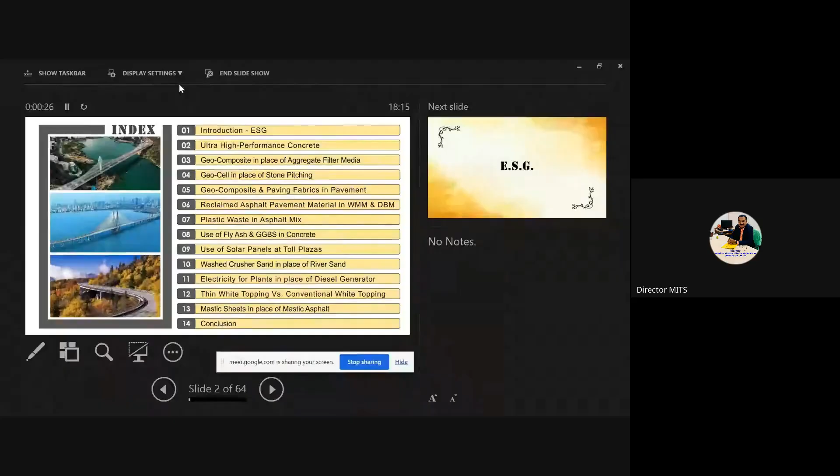I am going to discuss 12 topics, serial number 2 to serial number 13. These are the 12 topics I'm going to cover. I'll try to cover it very quickly, but they're very interesting, not only for civil engineering but for mechanical, electrical, for everyone.

If you see the left-hand side, there are 3 photographs. All those are live photographs of Indian engineering innovations, designs, and construction by Indian engineering companies. The first photograph is in Hyderabad at Durgam Cheruvu, the cable stayed bridge, done by L&T. The second is of Bandra Worli Sea Link in Bombay, very famous, constructed by HCC. The third one was done by KMC in Tripura. So these are all jobs done with this innovative and new generation using sustainable materials, etc.

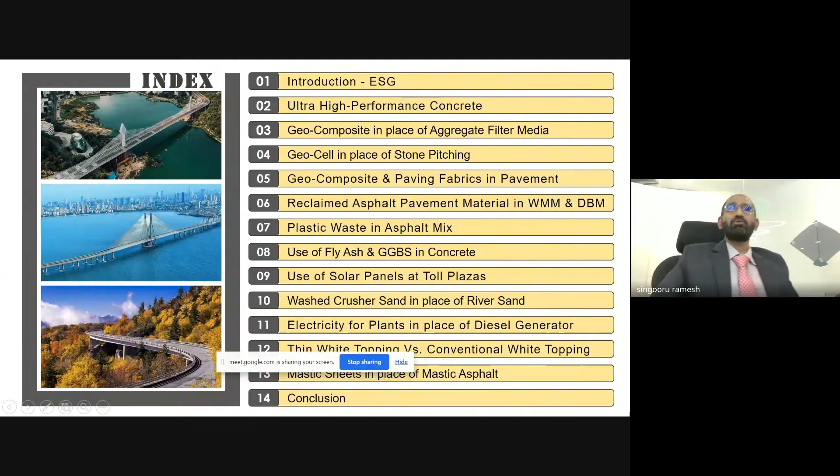So I'll just tell you about ESG. Why am I talking about ESG? ESG means environmental social governance. I want to tell everyone here, ESG is the need of the hour. Every company has to be ESG compliant now. If any bank has to give a loan, or any fund-based lending company wants to give a loan to a construction company, they have to be ESG compliant, only then they give the loan. Even many foreign funds are subject to ESG compliance. So ESG is important, this subject is related to ESG, that's why I'm talking about it.

What is ESG? ESG means environmental social governance. It includes evaluating the company's corporate climate policies, waste reduction, pollution control, toxic waste management, energy use policy, natural resource conservation, animal treatment, and environmental compliance. These factors help you know the company's commitment to environmental well-being. This is a very important aspect, and on this basis only we are going to take our presentation forward.

Then the social impact involves assessing an organization's stakeholder relationships, CSR activities, employee treatment and satisfaction levels, workplace welfare, etc. It shows how committed and responsible the company is towards society. Then governance, associated with elements like honesty, transparency, integrity, leadership, and so many important things. So these three are very essential for ESG compliance.

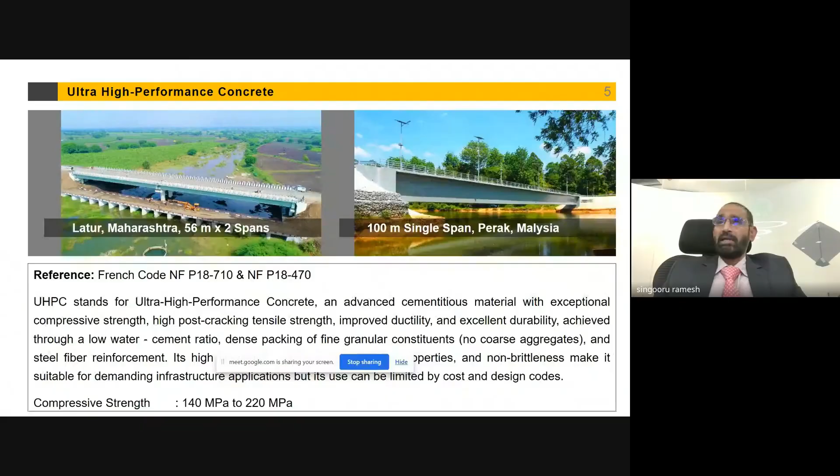Now, if you see the characteristics, as I said, it has high compressive strength and ductility, exhibiting a strain hardening behavior after cracking, meaning it can sustain tensile loads even after it's cracked, unlike brittle conventional concrete. If you see conventional concrete, when it cracks, it will not take the tensile load, but even this cracks, it will still take tensile loads. That is the beauty of this product.

Then durability. Its discontinuous pore structure reduces liquid ingress, leading to enhanced resistance to chloride and a long lifespan. High flowability, the material has

excellent workability and self-compacting properties, eliminating the need for compaction. Yesterday, somebody was asking whether it is self-compacting or not, a question was put. So yes, this has self-compacting properties. Then dense microstructure: it lacks coarse aggregates and uses an optimized proportion of fine granular constituents like Portland cement, silica fume, and fine sand for dense packing. Fiber reinforcement is the main ingredient.

Discontinuous steel fibers are incorporated to improve post-cracking tensile strength and ductility.

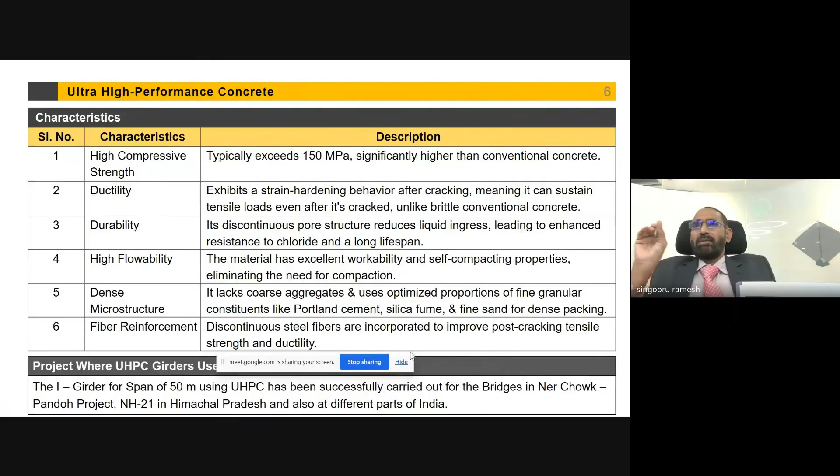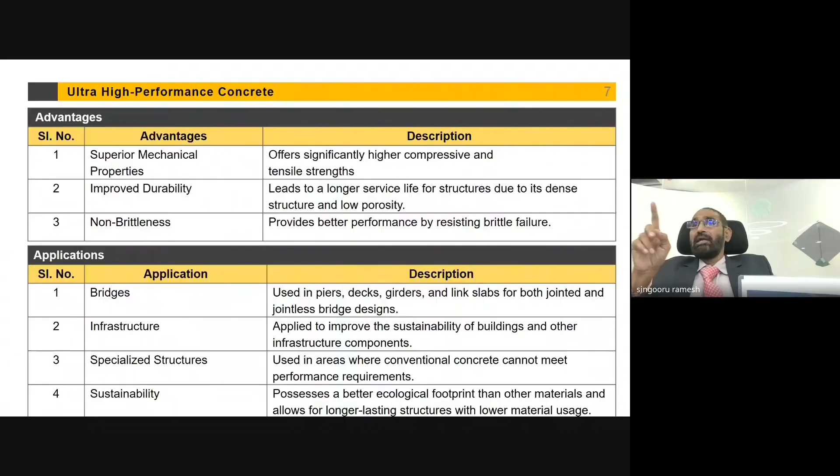I'll show it in the next slide. It has superior mechanical properties, offers significantly higher compression, improved durability, leading to longer service life, and it's non-brittle, providing better performance and resisting brittle failure.

Its applications are in bridges for piers, decks, girders, link slabs, etc. It's used in infrastructure and buildings also. Then specialized structures, where conventional concrete cannot meet performance requirements. Sustainability-wise, it possesses a better ecological footprint than other materials and allows for longer lasting structures with lower material usage.

The advantages are due to reduced section thickness of flange and web, the weight will reduce by almost 50%. That is one big advantage. So the reduced weight per meter helps in designing longer spans, up to 80 meters and 100 meter spans. That is the biggest advantage. If you want to go with normal RCC concrete, you cannot achieve such long spans. That is the advantage of this high UHPC.

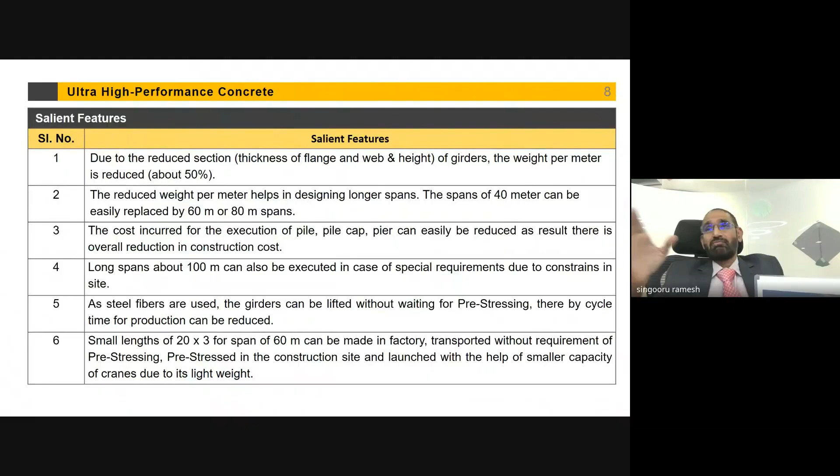And as I said, steel fibers are induced inside. So smaller lengths, like 20 meter by 3 spans, can also be used if we have a transportation issue. We can make it in smaller spans, transport it, and do the post-tensioning at the site location. So that is also one advantage here.

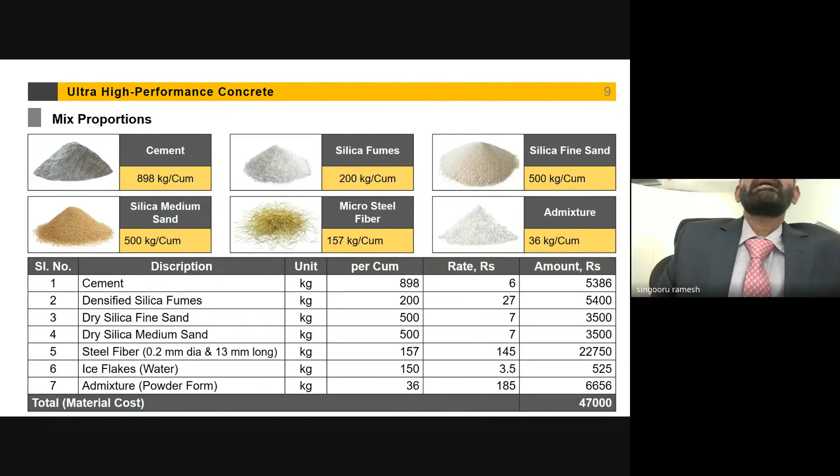You can see the composition: cement 898 kgs, silica fume 200 kgs, silica fine sand 500 kgs, silica medium sand 500 kgs, micro steel 157 kgs - this is what I was talking about - and admixture 36 kgs, which will be in powder form.

If you see, the cost per cubic meter is around 47,000 rupees, whereas the conventional concrete cost will be around 5,000 to 6,000 rupees only. You may ask, when it is so costly, why should we go for this? I think we will leave these questions for answering at a later stage.

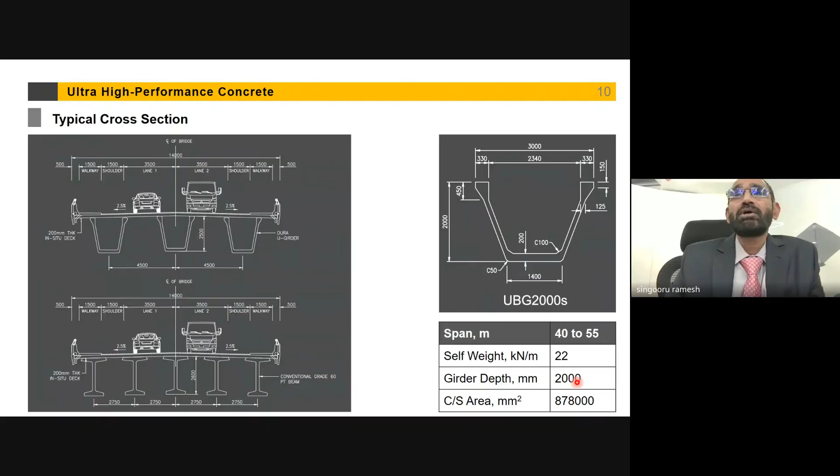So this is the typical cross section. You can see the top cross section. Let me put the pointer. You can see this is the ultra high performance concrete, whereas this is conventional. So this will be the cross section. You can see here the self weight, the girder depth, and the cross section area. All these things will come down.

You can see for different spans also what will be the self weight, the girder depth, and other parameters. That is also mentioned here.

So you can see the typical plan of a ready mix plant for ultra high performance concrete. And if you see the table below, you can see, suppose there is a pile foundation of 1.2 meter diameter.

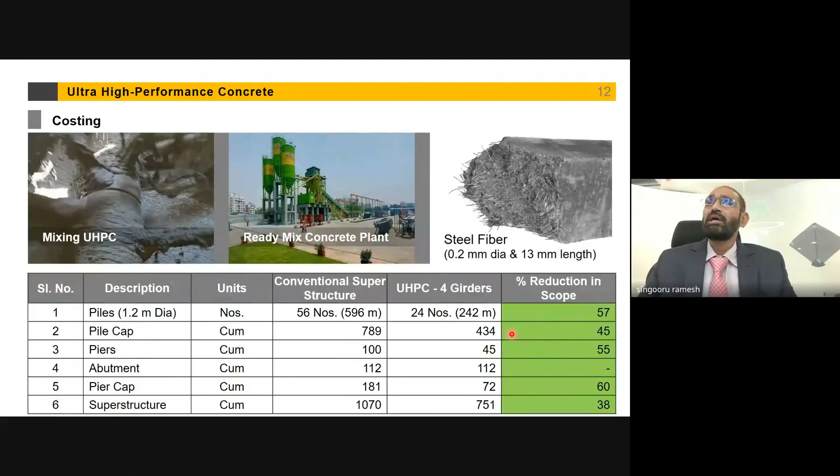In conventional superstructure, if you are using 56 numbers of piles, if you use UHPC girders, you will require only 24 numbers because you are increasing the span. So the reduction in scope is 57 percent. Your pile cap count of 789 numbers can reduce to 434. Piers of 100 can be reduced to 45. Abutment pier caps of 181 can reduce to 72. Superstructure of 1070 cubic meters can come down to 750 cubic meters. So these are the savings.

And you can see these, these are the steel fibers. The dia of the steel fiber will be 0.2 mm and the length will be around 13 mm. They are with copper coating, which is provided for chloride resistance, sulfate resistance, etc., and also for corrosion protection.

See, these are the finished products where they have been launched in different locations. They are being used. You can see here also in Dharampuri, they have done 102 meters.

Why am I talking about these spans? I'll tell you. If you see the obligatory spans constructed in cities, in metro cities and all, there will be obligatory spans. In obligatory spans, a flyover will be there, and in between there will be huge openings where a 4-lane, 6-lane road will be passing, so there will be no obstruction. In such locations where you want obligatory spans, you can use the long spans.

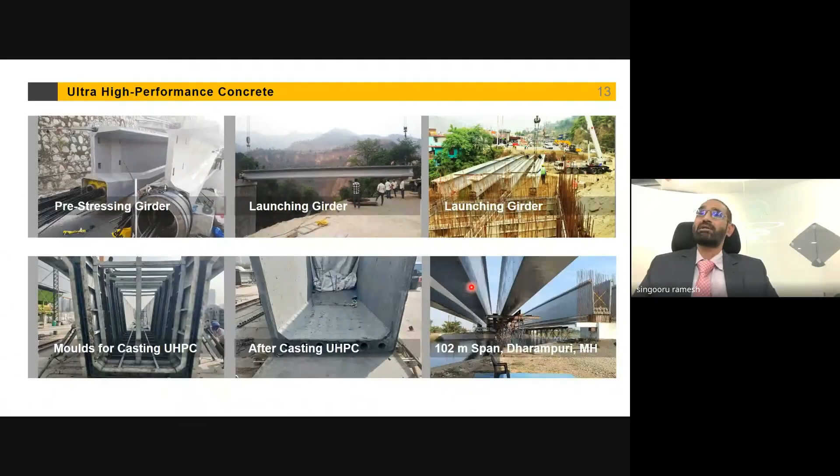This is being largely used by many construction companies, including L&T, Navyuga, HCC, many good companies, Afcons. They are using these kinds of things for different specified applications, some special structures where the span is higher. Even in railway spans, where there is a ROB, you can use this kind of span, because in railway bridges there should be no interruption - there will be no pier or anything in between. So that is about the UHPC.

Now I will come to the next topic, the geocomposite in place of aggregate filter media. Filter media is one important material. It's normally stone aggregate, so again you have to do quarrying, which is again an environmental concern. With geocomposite, that stone quarrying will not be required, so cost will reduce, time will reduce. There are many advantages, and the application is also very simple.

If you see the left hand side picture, this gray color one is the geocomposite. Just fix it there, and you can fill with your soil - there is no more filter media required. At the bottom there will be one perforated drainage pipe, so whenever there is flooding or rain, the water will flow through the permeable soil and enter into that drainage pipe and get drained off.

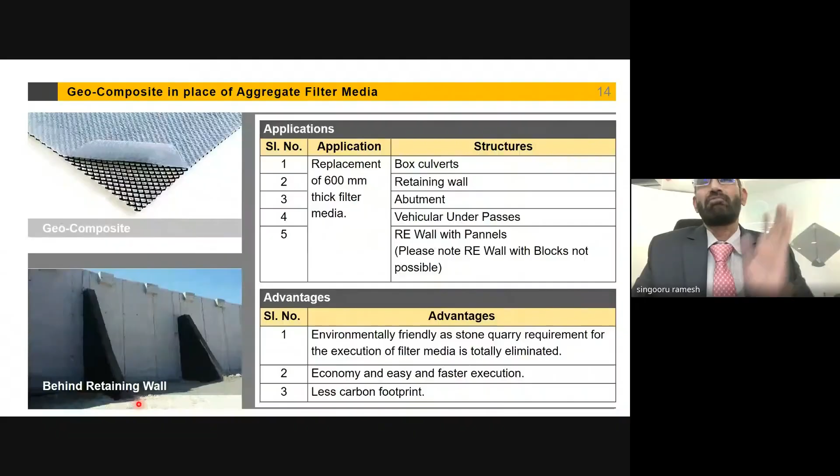So this is an effective solution, and the material here is also HDPE, high density polyethylene - so there is no plastic concern, and you can reduce the quarrying, as I told initially. This is also one of the ESG measures, environmentally friendly, as I mentioned in the first slide. There is a reference code also for this: SP59, and the railway code RDSO IRS 0006.

The combination is geotextile, a permeable fabric like synthetic material typically made from polypropylene or polyester, at top and bottom, and geonet made of high density HDPE or polypropylene at the center.

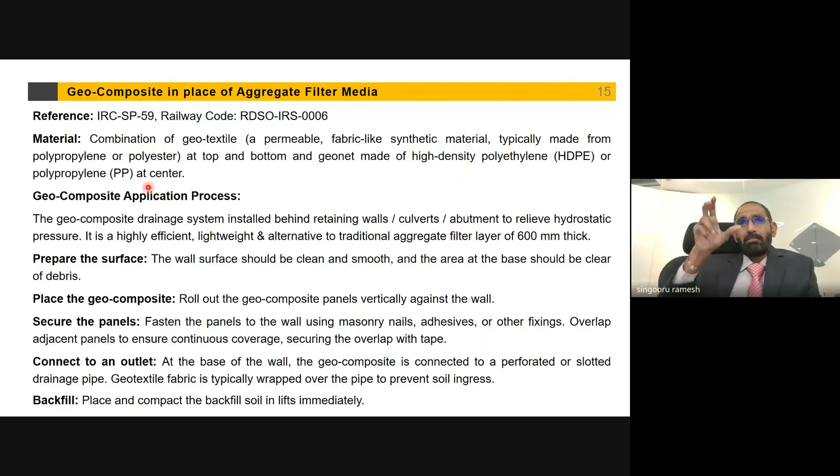For geocomposite application: the geocomposite drainage system is installed behind the wall, at the bottom. You have to prepare the surface, then place the geocomposite, secure the panels - you have to nail them so that it will not slip. Connect it to the outlet, then backfill with the soil. That is the typical application, step by step.

You see the conventional one. This is the filter media, and this is the stone aggregate. So you have to excavate, bring the stone aggregate, and dump it there. That is a cost. All that headache is not there, and it's eco-friendly.

You can see the cost comparison also here. If you go for filter media, suppose for 5,000 square meters, it's costing you 90 lakhs. Here it is saving 75 lakhs. There is a cost saving also.

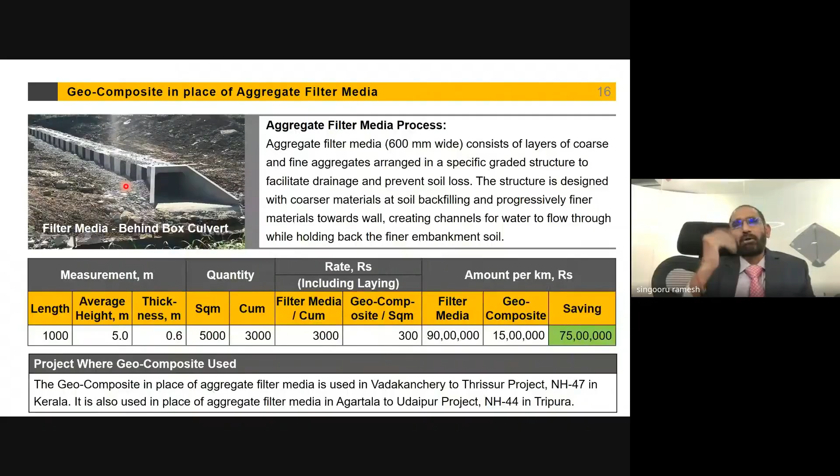In fact, I want to tell you, we used this in the state of Tripura. We had designed this through CRRI, Central Road Research Institute, and we used it for a 48-kilometer stretch in Agartala, from Agartala to Udaipur. Udaipur is a city, a town in Tripura, and Agartala is the capital of Tripura. We used it, and it was very successful. It's performing very nicely.

Now I'll go to the next topic, the geocells. This is also another interesting, innovative, sustainable material. It is used in stabilization of soil to control erosion, to reduce GSB and wet mix when used in pavement, slope protection, retaining walls, and canal lining. So there's no need to execute aggregate filter media. Cost saving, time saving, reduced dependence on stone quarry and crushing — so many benefits are there.

Boulders are not required for slope protection when geocells are used. Stone boulders are also not required. Quarrying can be avoided. It's again environmentally friendly, and it is also relevant to IRC SP59. It's perfectly mentioned in the code.

You can see the typical picture of how geocells are applied. In the olden days, preparation of the slopes was a cumbersome exercise. We had to bring the stones and skilled masons to place it. There was a risk of injuries, so many things. Nothing here — just bring the geocell, lock it at the top and bottom, and do the vegetation.

Site preparation, geotextile placement, geocell placement, anchoring the geocell system, and filling the geocells — it is so simple. After some time, when you choose the infill material like some vegetation, it will become totally green. It will look like a cricket pitch — green and very elegant, very eco-friendly. It will generate a lot of oxygen and reduce carbon.

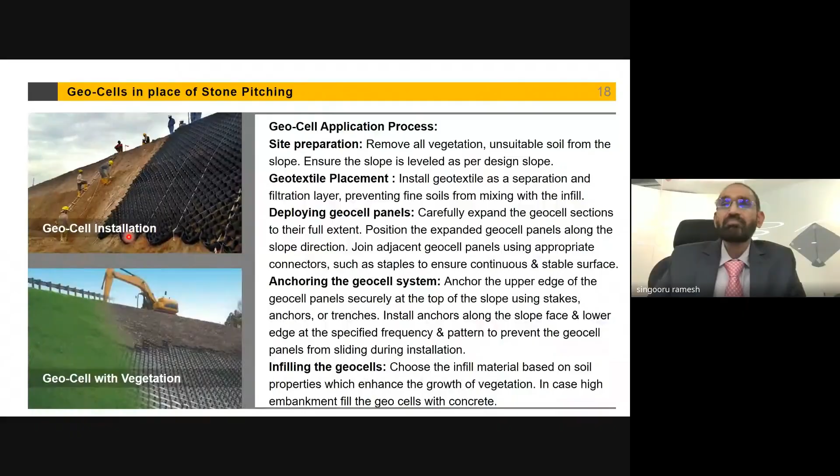And also we used it in Tripura, in Agartala. These are very innovative, very eco-friendly, and easy to fix, with no much labor required, and they are also in line with the codal practices.

Next is geocomposite and fabric. These are the two items — one is geocomposite and one is paving fabric. What is geocomposite and its applications, and what is paving fabric and its applications?

Geocomposite is an engineering material combining geosynthetics, that is geogrids and textiles, to provide multiple functions such as separation between two layers, filtration, drainage, and protection against water intrusion. These materials are used as drainage layers in stabilized soil to prevent water from damaging the road structure and enhance overall performance and longevity.

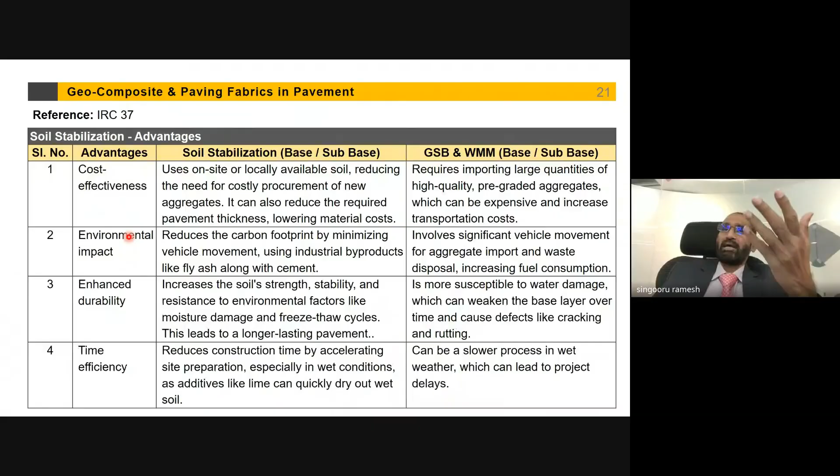Cost effectiveness, soil stabilization using on-site, locally available soil, reducing the need for costly procurement of new aggregates. It can also reduce the required pavement thickness, lowering material cost. GSB requires bringing large quantities, crushing, which is very expensive. Environmental impact, the carbon footprint will be minimized here, whereas otherwise there's lots of waste disposal, fuel consumption, diesel generators working.

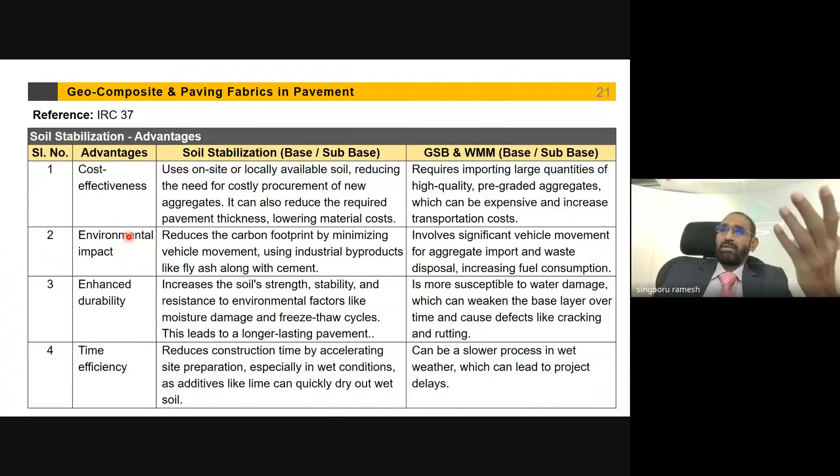Then durability, this is more durable, it increases the soil strength, and it is less susceptible to water damage. And time, as I said earlier, the construction time - suppose you want to do 1 kilometer, if it takes 2-3 days conventionally, this will be over in 2-3 hours. There's a lot of difference, a lot of time saving, apart from cost saving.

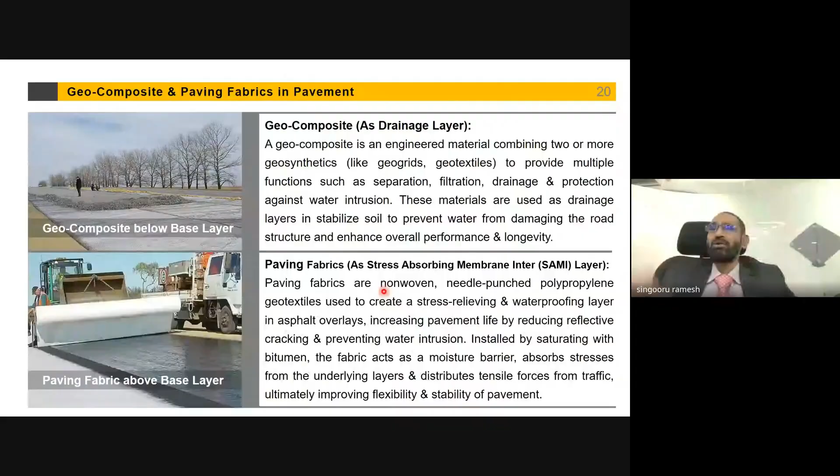Then the paving fabrics. Going back, the second one is the SAMI layer, stress absorbing membrane interlayer. This will normally be below the DBM, that is dense bituminous macadam, and the WMM, wet mix macadam. Between them this SAMI layer comes, and on top of that the DBM layer comes. The idea is to prevent surface cracks from penetrating into the DBM layer, so the bituminous layer and the road will perform well during wear and tear. If these cracks penetrate to the DBM, the road will get damaged.

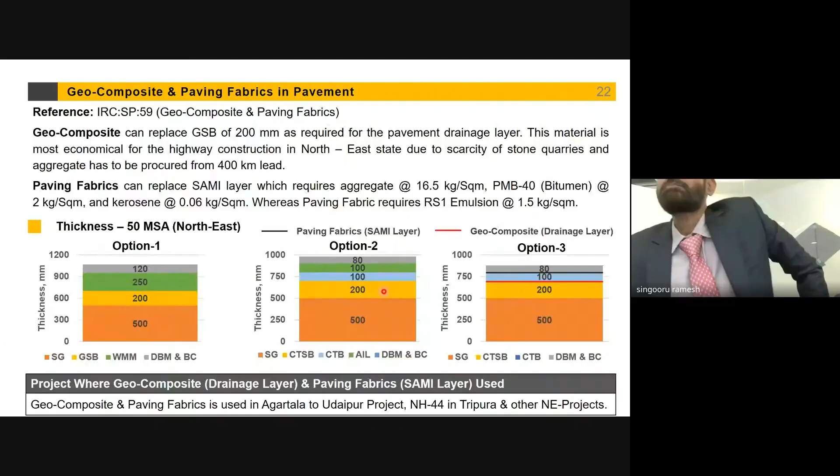The conventional method uses stone aggregates for the SAMI layer, but this paving fabric is an advanced technology. You can see this typical example, mentioned in IRC code SP:59, the geocomposites and paving fabrics. You can see the various options.

For 50 MSA, we have used in the northeast: option 1 is 300 thick, 600 thick, 900; option 2 is 250, 500, 750; option 3 is 250, 500, 750 and 1000, so about 750 only. The thickness has drastically reduced. This we have also used in the state of Tripura. MSA means, as you know, roads are designed for MSA - 50 MSA, 75 MSA, 100 MSA.

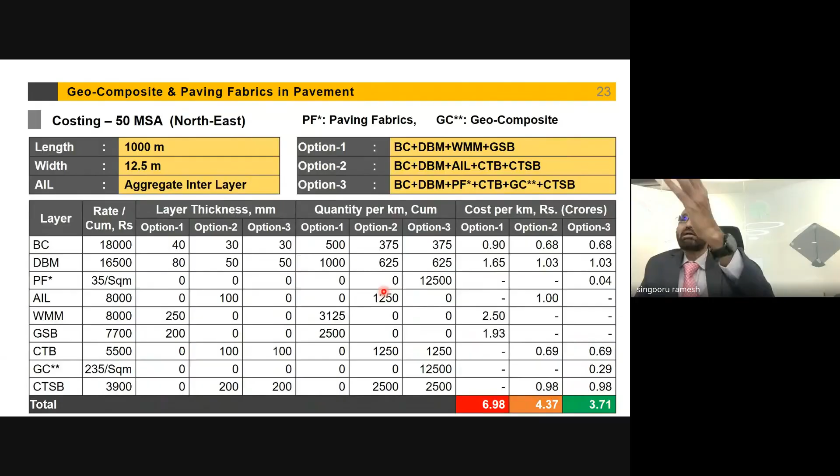I made a small cost comparison for options 1, 2, and 3. In option 1, the cost per kilometer is 6.98 crores, whereas if you go with option 3, using this geocomposite fabric, it comes down to 3.71 crores. Your product is eco-friendly and your cost is also coming down, and at the same time there's a lot of time saving. So a lot of benefits are there in this.

My point is, we have to adopt all this. Already this is widely being used. In fact, I want to proudly say that when I was CEO of my previous company, I took the initiative and did the tests, CBR tests, with my team, and we were successful. We have done this project in the state of Tripura for a 48-kilometer stretch, and believe me, it's almost 10 years old now.

There is no iota of any damage till date, and it's a totally rain-prone zone. Even then, there is no damage. It's performing very well.

So this has been replicated across Northeast, and now it is widely being used in every project, because there's a lot of crisis in the market for stones, since quarrying has been restricted. Quarrying in every state has a lot of restriction because of environmental concerns and local issues. People are objecting to quarrying because there's a lot of noise pollution, a lot of accidents, etc.

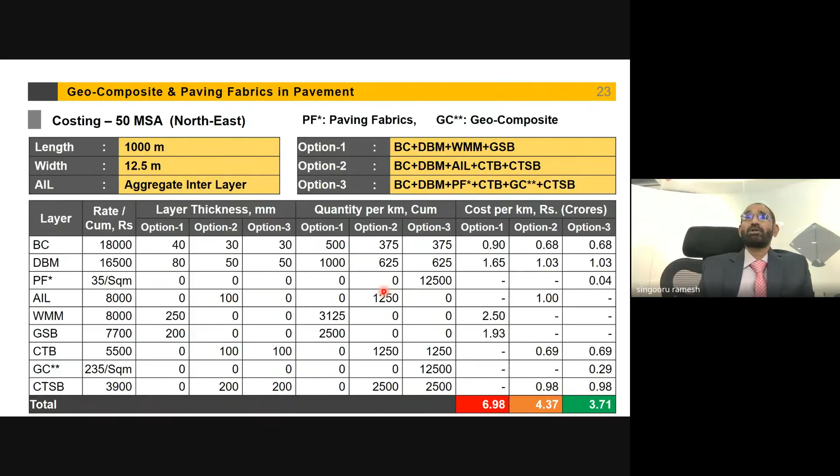They are not permitting it, so stone quarrying has become a highly restricted activity. So these innovative solutions are giving good results as well. It is saving time and cost, and also environmentally friendly.

Next is the RAP, reclaimed asphalt pavement material, in wet mix and the asphalt mixes. This is also as per IRC 120. This is also widely being used and is very important.

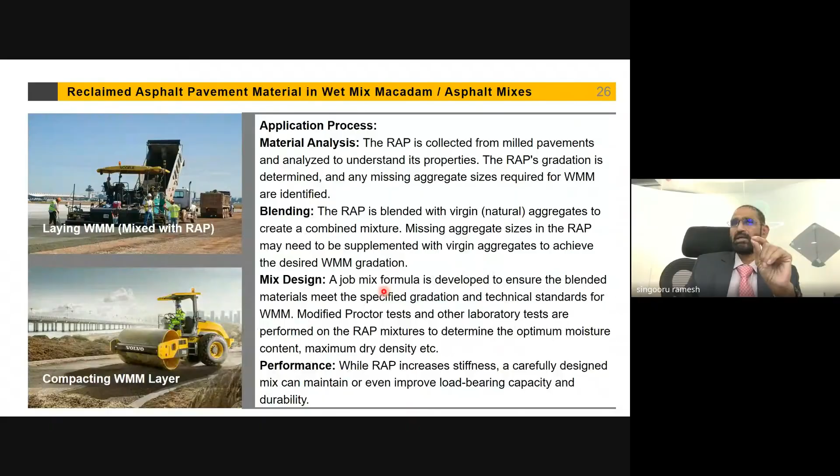Sometimes RAP may be decreased or increased, or bitumen percentage may be decreased or increased, or filler may be increased or decreased, binder may be increased. All these combinations will be worked out. While RAP increases stiffness, a carefully designed mix can maintain or even improve load-bearing capacity and durability.

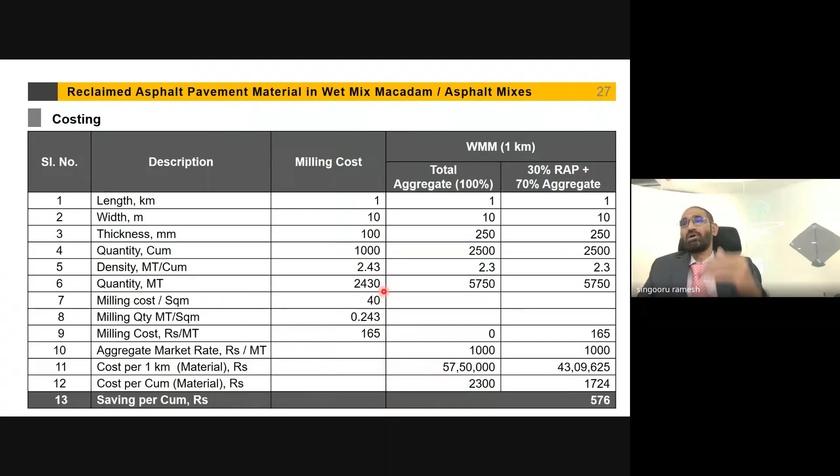So you can see per cubic meter, we just made a simple analysis of how much cost saving is visible. Almost 576 rupees is the cost saving in the entire process, including the milling cost, everything has been calculated. If you go with the conventional process it will be 2,300, whereas it is 1,700.

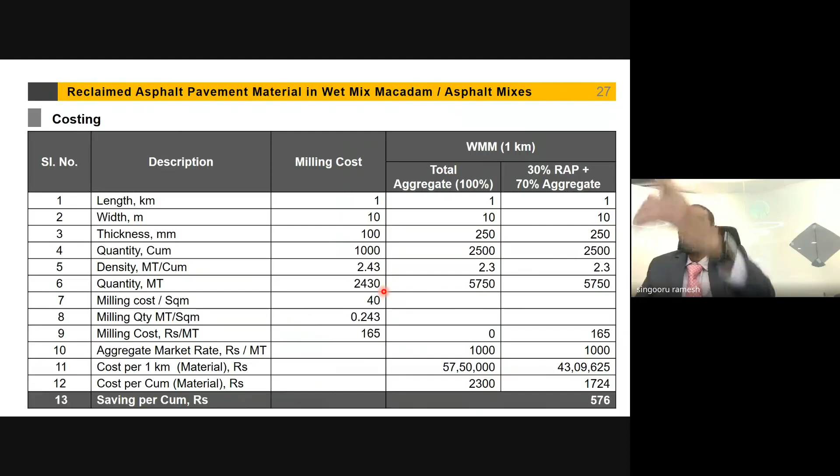These costs depend upon the place. Some places aggregate cost may be more, some places bitumen cost may be more because of transportation. So all that has to be worked out at a particular location. This cost, in some projects, may be 2,300, maybe 2,000, or even 1,800, or even 1,500. It all depends upon the cost of the ingredients, but this particular cost is from a particular project we analyzed. However, you can see the savings.

With appropriate controls, correct proportions of ingredients, and the employment of adequately equipped plants, it is possible to produce an excellent conglomerate which in no way falls short of the mixture obtained using only virgin materials.

Generally, it is recommended to use high RAP percentage in the lower layers of the pavement. While in the surface layers, which are easily ruined, it is preferable to use very low percentages or better to avoid it. The knowledge of the aggregate in the RAP is required to identify the type and quantity of virgin aggregates required to integrate the grading curve. The knowledge of the bitumen content in the RAP, yes, this is very important.

As it is aged, it has a lower penetration than the original virgin bitumen and is also harder because during the mixing phase in the plant and during its life in the road pavement, it is subject to oxidation processes which alter its properties. Hence, when employing RAP, the higher viscosity of the older bitumen might also give a certain resistance to mixing.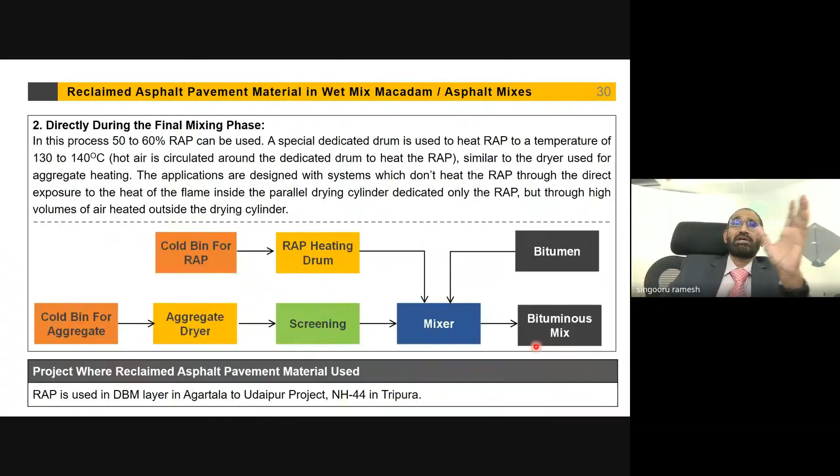used. The temperatures at which they have to be are 130 to 140 degrees centigrade for one, and in case of this one, it will be at 35 to 40. So all these temperatures are also defined.

So again here we have brought the relevant codes, the benefits, technical benefits, and also the time saving elements have been discussed, and the cost.

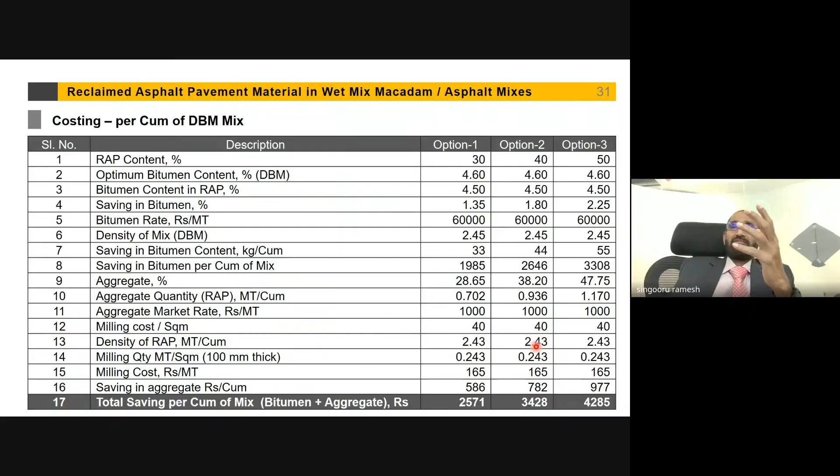If you see here, total savings on bitumen plus aggregate, option 1, 2, 3 - there it is nearly 4,285 rupees saving because your RAP content has increased to 50%. So 4,285 per cubic meter is a big amount.

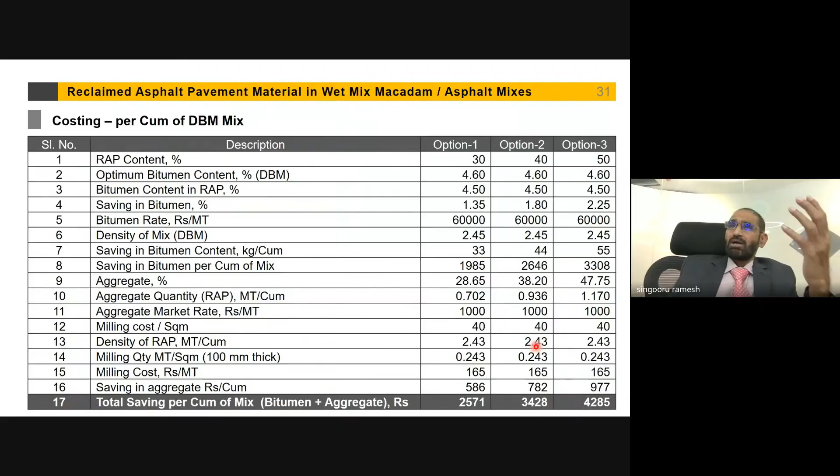So this is a solution for what we call the eco-friendly material - the environmental balancing, the time saving, cost saving, and technically viable. All four parameters are met here.

So this is now coming to plastic wastage. Plastic wastage is a big concern, it's a global concern. Today, if you see everywhere, plastics are very widely used, and they are dumped in different garbages, and the local municipalities are facing a challenge in removing them from the cities, from the communities, etc.

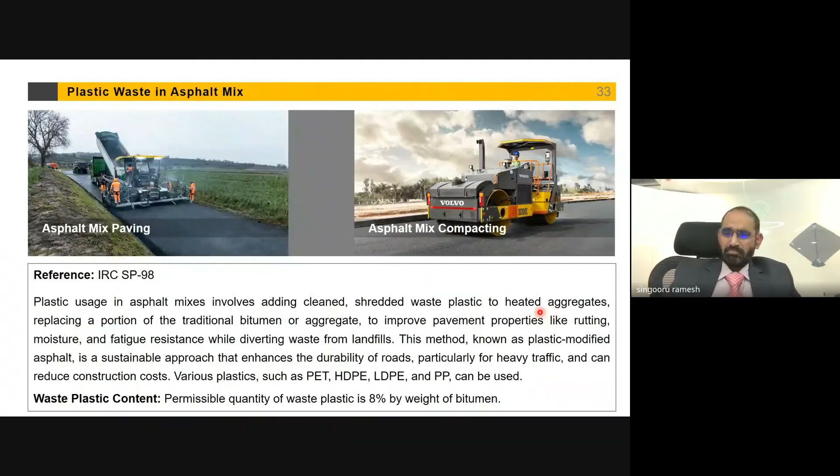So now collecting all this plastic waste and doing some recycling and using it for certain useful applications - it is environmentally friendly, it will reduce pollution, it's also cost effective and time saving. More than time saving, it's cost effective. You see,

one more thing, however, the permissible limit is only 8%. You cannot go 8% beyond the weight of bitumen, not 8% of the total volume of the mix. The limitation is 8% of the weight of the bitumen being used in the mix. That is the limitation.

So waste plastic, low density LDPE is used. LDPE includes carry bags, sacks, milk pouches, bin lining, cosmetic and detergent bottles. HDPE is carry bags, bottle caps, household articles, etc. Polyethylene terephthalate, PET, we call drinking water bottles. Polypropylene - bottle caps, closures, wrappers, biscuit packets, etc.

Microwave trays, polystyrene - yogurt pots, etc., food trays, egg boxes, disposable cups. Polyvinyl chloride - mineral water bottles, credit cards, pipes, gutters, and all these things. For all these, there is a dry process and a wet process.

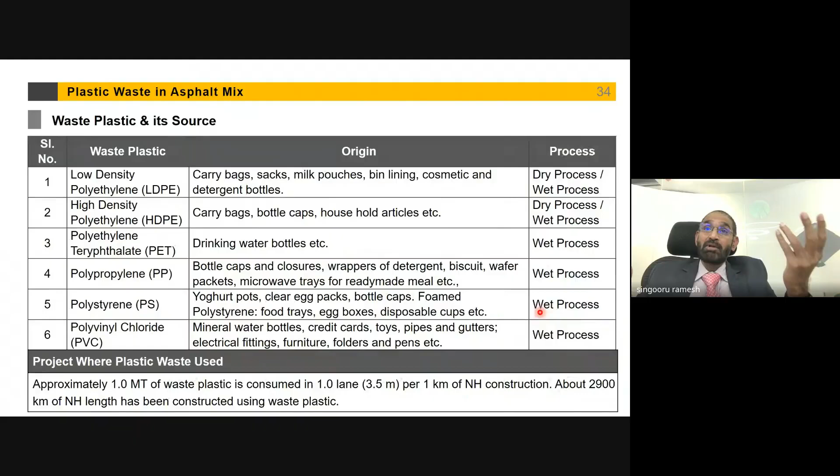Approximately 1 ton of waste plastic is consumed in one lane of 3.5 meters per kilometer of NH construction. About 2,900 kilometers of NH length has already been constructed using waste plastic.

But I'll tell you, I do not know how many of you are aware, there's a huge road network in the country - it is, I think, more than 3 lakh kilometers of network in the country. And we are targeting to enhance it by another 2 lakhs in the coming 5 years. So we have utilized it for only 2,900 kilometers. You can imagine how much plastic waste can be utilized for these purposes, which is eco-friendly and also cost-effective and technically acceptable.

You can see how the blend is there in the pictorial demonstration. The preheated aggregates, then the plastics which are cut into pieces, those two are used in the mix. Then the heated bitumen is mixed in the asphalt mix, and the mixer will mix it. Again, this also will happen as per the mix design.

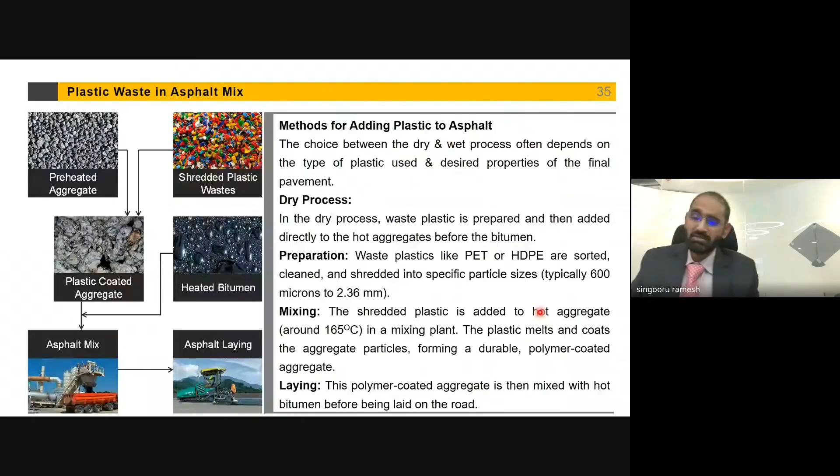So there are two processes here, dry and wet process. This is the dry process. Typically the size of the plastics will be around 600 microns to 2.36 mm, and the temperature at which they are to be heated is 165 degrees. So this is what the ingredients mix looks like.

So wet process advantage is normative guidance and engineering experience, though it is a bit expensive. Drawback is complex production process, specialized mixing and storage facilities. Advantage is high viscosity, drawback is poor storage. Dry process is cheaper but lacks normative guidance, and has a simple production process as advantage. Drawback is performance of mixture, and drawback is poor water stability.

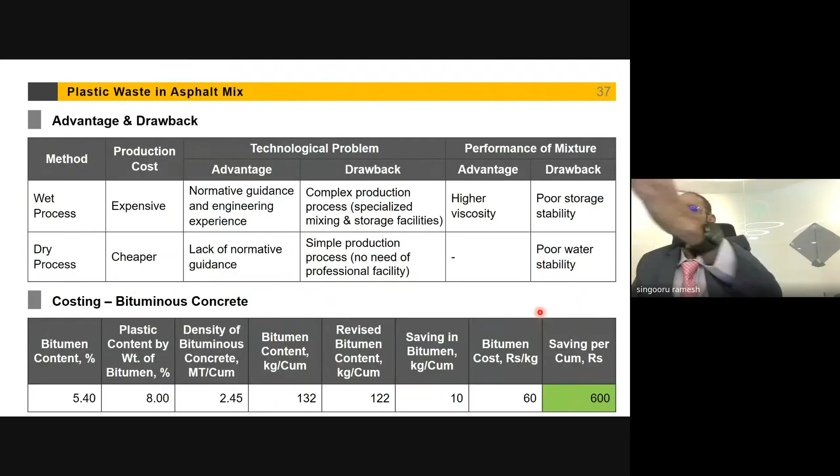If you see in the cost perspective, bitumen percentage is 5.4, and if you use 8%, because 8% is maximum limit, it will come to some 4.9%. That means where you are using 132 kgs, it will become 122, so there is a saving of 10. That is almost, the total overall saving will be 600 rupees per cubic meter by using this plastic. That is the advantage.

If you see, cardiologists are there, orthopedicians are there, then child specialists or pediatricians are there, but there is a general medicine doctor. Now you can call me a general medicine doctor in construction. I am there everywhere. But if you put some design questions, I will have to get into the designs and discuss with the design team and answer. But general questions, yes, I will definitely answer. There's no issue in that. It's just I am telling in a lighter vein.

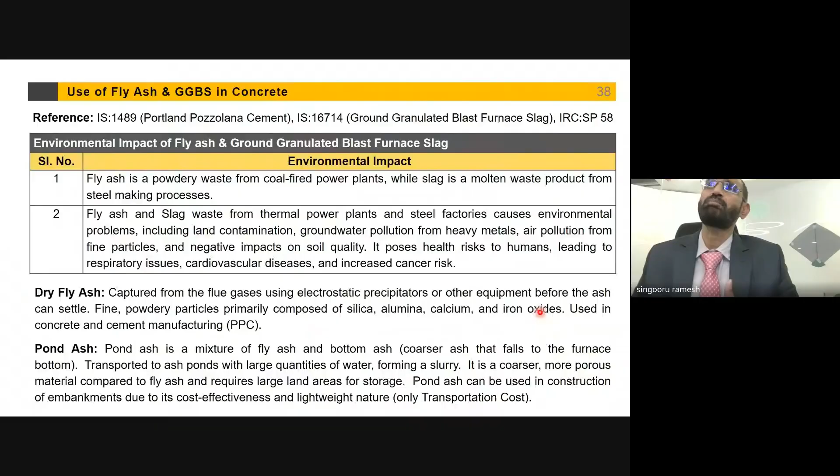Pond ash is a mixture of fly ash and bottom ash, coarser ash that falls to the furnace bottom, transported to ash ponds with large quantities of water, forming a slurry. It is a coarser, more porous material compared to fly ash and requires large storage area. So only transportation cost will be applicable here.

So this is about fly ash. I'll run fast because of time constraint. I'll just go to the key features. We are already using it in our Pune ring road, currently. You can see the various details here.

Then GGBS, that is ground granulated blast furnace slag, is a byproduct of the steel industry. It reduces carbon emissions, improves resistance to chloride ingress and sulfate attacks and thermal cracking. It is used in various infrastructure projects, including bridges, tunnels, foundations, and more sustainable, durable structures.

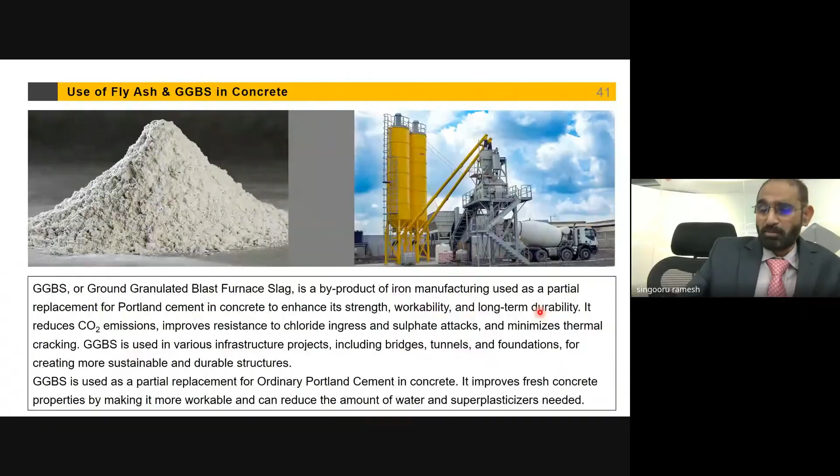Now this is one new important thing. All of you are aware that solar projects are happening, but interestingly, the solar panel concept is growing very fast. I want to tell you, the Cochin airport has installed 50 megawatt of solar panels. You can imagine 50 megawatt in one airport. So it is very, very environmental friendly.

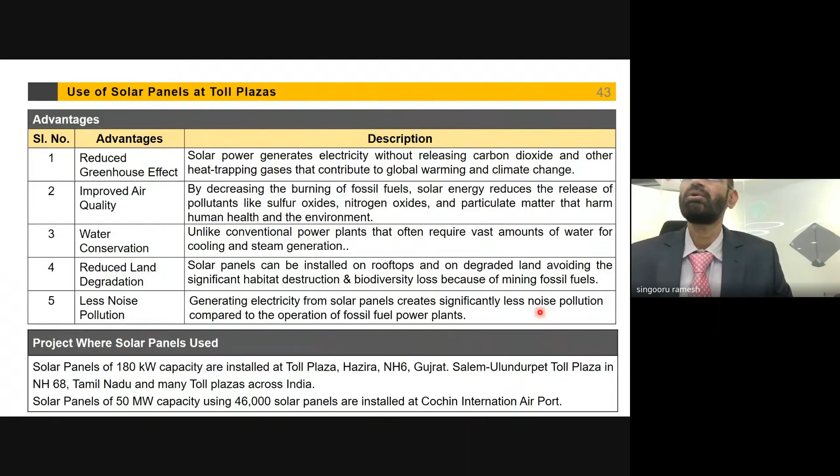There is no pollution at all. So reduced greenhouse effect, improved air quality, water conservation, reduced land degradation, less noise pollution, what not - so many advantages. I don't want to get into the description, I am just telling you the brief advantages.

It has been used in even road projects, in Toll Plaza in Gujarat and Tamil Nadu. Solar power is the energy from the sun that is converted into usable heat or electricity using technologies like photovoltaics and concentrated solar power. Photovoltaic PV cells directly convert sunlight into electricity, while concentrated solar power uses mirrors to focus sunlight to heat a fluid, which then drives turbines to generate electricity. It is a clean, renewable, and abundant energy source with diverse applications, from powering single homes to large energy plants.

As I said earlier, the thermal power plant generates a lot of fly ash and pond ash, but that is being used in cement manufacturing and the road sector. But in solar panels, it's clean energy, green energy. There is no requirement of any such thing - it is directly environmental friendly.

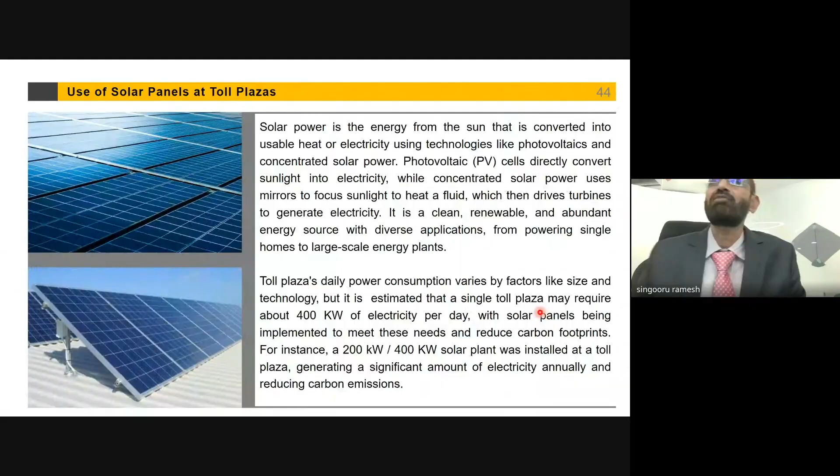In India, installing a rooftop solar system for a commercial or industrial facility like a toll plaza costs around 35,000 to 50,000 per kilowatt. So there are low carbon benefits, low carbon footprint, sustainable infrastructure, and government is also encouraging. Government has been supporting all these new initiatives, and is even funding them - government is giving funds also for all such new initiatives.

Just a typical example - if you see, for 200 kilowatt, suppose cost is 18.74 lakhs, here it's 37.49 lakhs. But look at the carbon dioxide reduction in metric tons per year: in the first case it's 240 metric tons, and in the second case it's 480 metric tons. This is the beauty of this power generation.

I want to tell all the viewers and listeners that, as I said, I have executed thermal power plants, I did solar power plants, I did wind power plants. The potential in this country for power generation - only in solar, in the next 5 years - is 500 gigawatt. That is the potential, and in wind it is 200 gigawatt. In thermal also, I think it's somewhere about 100 or 200 gigawatt. So there's a vast requirement of power, and we have to become more and more green.

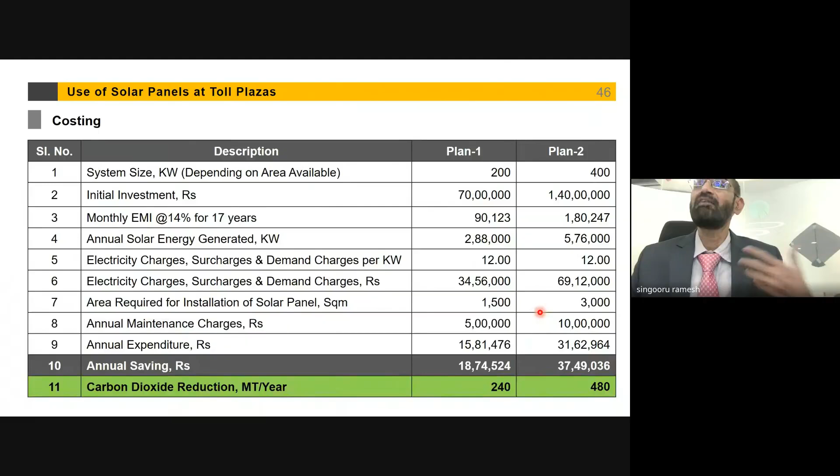So we have to encourage solar power, wind power. In Sydney there is a power plant that uses waves - sea waves are used for generation of power in the city of Sydney, Australia. These innovations are what I was trying to impress upon viewers in my opening address: innovative technologies have to be used, and the mind has to explore new ideas for this type of innovation. This is a benefit to human beings - a benefit to all of us, to our own fellow human beings.

So this is washed crusher sand used in place of river sand. River sand has become a big concern - everywhere there is a big concern about sand quarrying. State governments are imposing a lot of restrictions because of local transportation issues, local pollution issues, local law and order issues, local demands, etc. So the cost of sand is increasing, and construction companies are not able to afford the cost.

So this is simple crushing. Whenever we use a stone crusher, there will be powder, the stone dust which comes out, that will be used in place of sand. That falls under zone 2 - like zone 2 sand is here, also zone 2 will come. There will be a lot of silt in that, so washing will be done. This is also as per IS 383, so washing is done in this process.

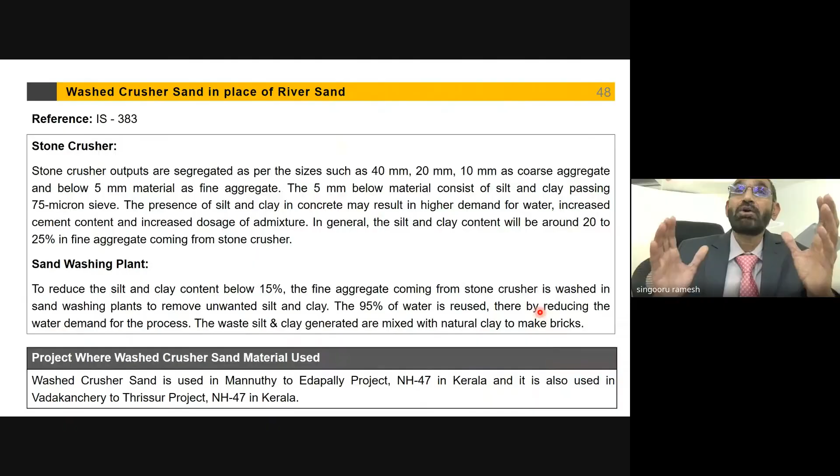There will be a reduction of almost 20 to 25% of this - the silt will be eliminated. So you will get good zone sand from that, after the washing.

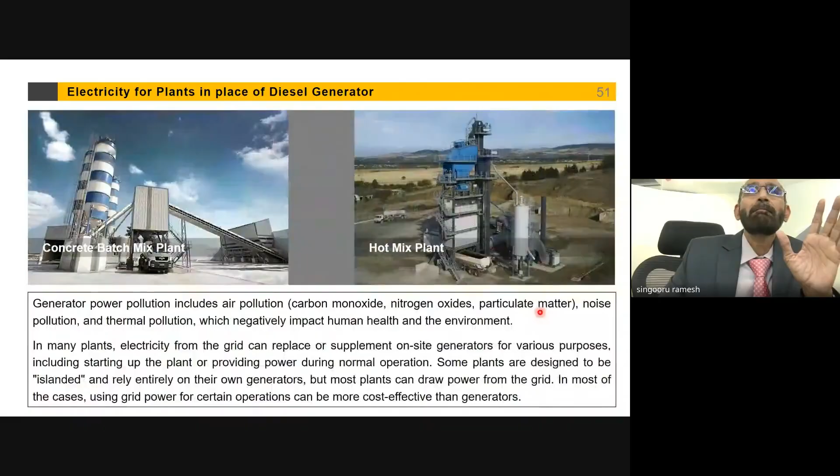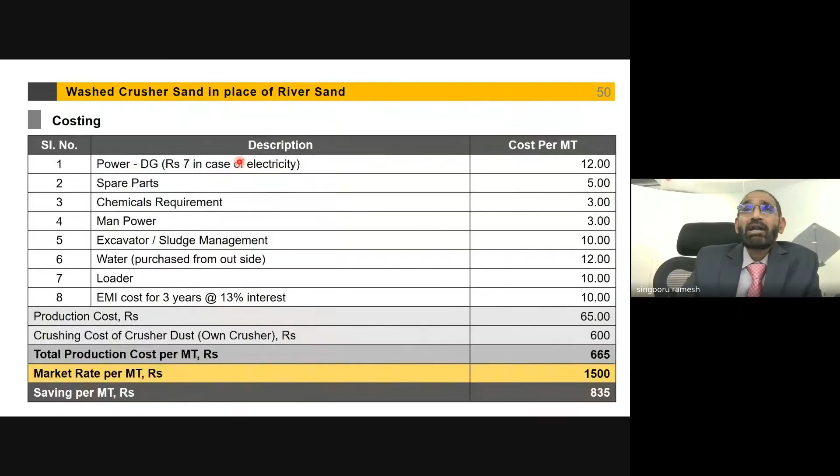It will go to the brick industry, and all the water, after the filtration process is over, goes for recycling. It will again be used, and the finished product will be used for concrete purposes. So there is a saving - as I said, there is cost saving, and also you are not depending upon river sand. That is the biggest advantage here.

People think that initially investing in the plant may cost some 3 or 3.5 crores, but that plant can be used for 3-4 projects. So the money you're saving is much more than the cost of the plant. People should not think about the initial capex - capital expenditure. That will be only an initial investment; it's not going to harm your budget, but in the long run it will give you a lot of benefit, and your dependency on local sand will come down drastically.

See, electricity - you can replace your generators. As I said, I already spoke about this. Now I'm coming to the concrete.

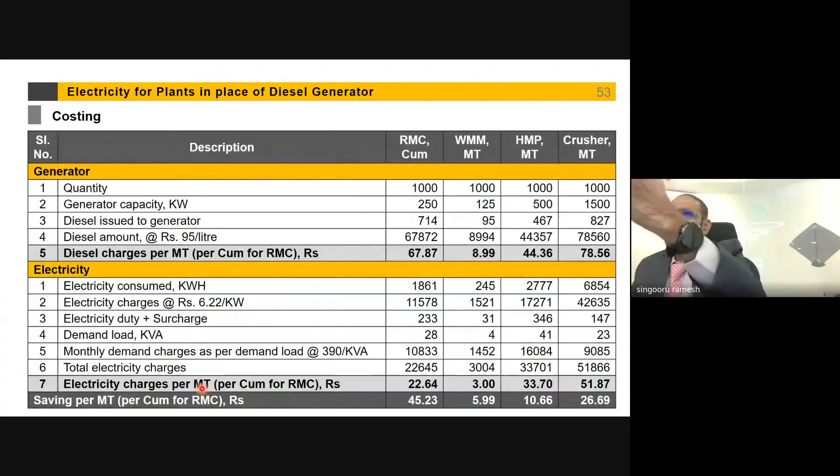If you use electricity produced directly from plants, from electrical sources, from generation, you see the cost - versus diesel generators which cause a lot of pollution. Per cubic meter, if it costs 67 rupees per unit with diesel, here it comes to 45 rupees. In wet mix, it's 8 rupees 99, a 6 rupee saving. In hot mix plant, it's 10 rupees saving. In crusher, it's 26 rupees saving - a huge saving when using HT from the substation. So you have to apply and pay per unit, but there's a lot of saving, and there's no pollution.

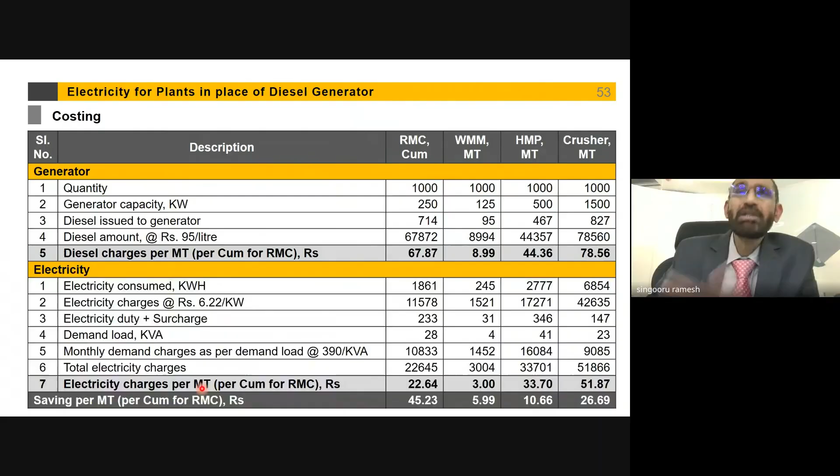There's thin white topping, and nowadays you are seeing white topping and thin white topping in cities. This is a growing demand. I am not going into too much detail because of time constraints. This white topping is widely practiced in cities to keep the road pothole free, and also to maintain uniform riding quality, giving a good finish. It can be done overnight without affecting traffic—one lane can be closed during night for the topping, and next day traffic can move. It is also eco-friendly.

This thin white topping is always done in small panels. In PQC, where we do large rigid pavements for heavy roads and expressways, the thickness is very high, 350 to 400 mm. But here it is only 100 to 150, maximum 200 thickness. The panels are also small, 1 meter by 1 meter or 1.25 meters. So there are no longitudinal bars, no transverse bars, no dowel bars.

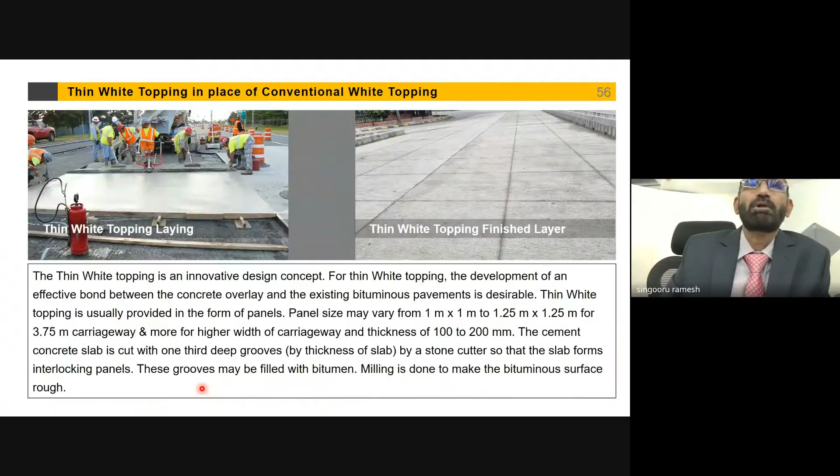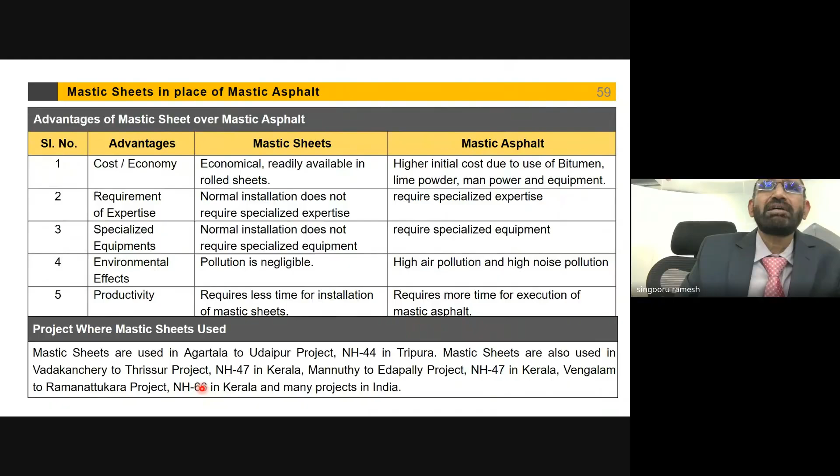Then mastic sheets. Mastic sheets are used in the construction of highways, bridges, and so on, widely used in every project in the country. Earlier we used to use what is called mastic asphalt—you had to do a hot mix, mix the sand, heat the bitumen, mix it, causing a lot of pollution, a lot of labor, a lot of injuries, eye contact issues, so many problems. Now, nothing—just lay this membrane, lay it and fix it. Very simple solution.

This is also very cost effective. For 1 kilometer, with mastic sheets there's a huge saving, 68 lakhs. If you go with the conventional method, it's time taking, labor oriented, with pollution and injuries—so many negativities—but here everything is positive.

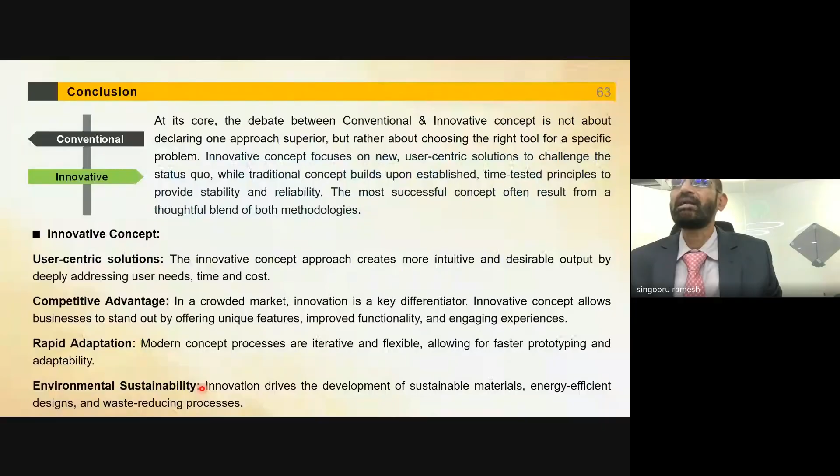So I had to conclude it quickly. I wanted to go into much more detail. Let me read out the conclusion: at its core, the debate between conventional and innovative concepts is not about declaring one approach superior, but about choosing the right tool for a specific problem. Innovative concepts focus on new user-centric solutions to challenge the status quo, while traditional concepts build upon established, time-tested principles to provide stability and reliability. The most successful concepts often result from a thoughtful blend of both methodologies. That's what I was telling the young generation, the faculty, the learned professors, and the intellectuals present here.

Then, innovative user-centric solutions bring competitive advantage, rapid adaptation, and environmental sustainability. So thank you all, I hope I have not bored you. I am open for questions, and I would request you all to put some questions so it will be easy for me to go.

So this is an entirely different topic. We had earlier discussed the sustainable new generation materials. Now this is also related to ESG, and it is for the airports. Let me start with my slides. Are you getting the full screen now? Yes sir. See, we had to spend considerable time in the first session, the second session will be a little shorter. I want to make it more concise to the subject. This subject has been prepared by me in very short notice, however I'm confident I will make the presentation in a convincing manner and attend to the questions as well. Thank you, let me start.

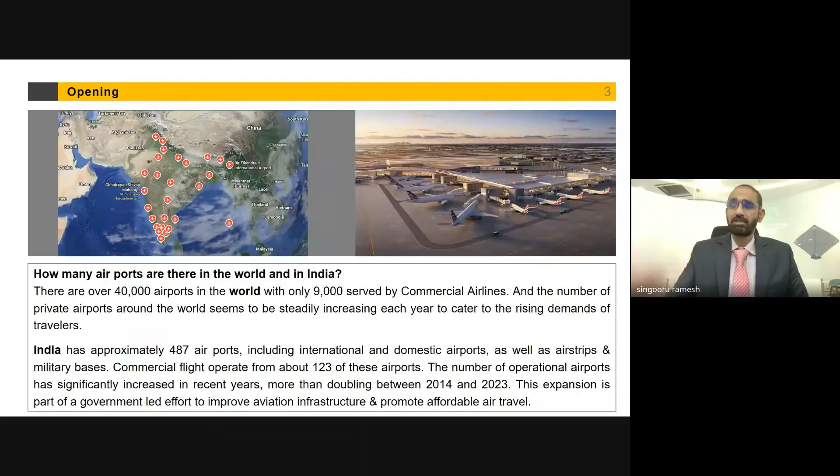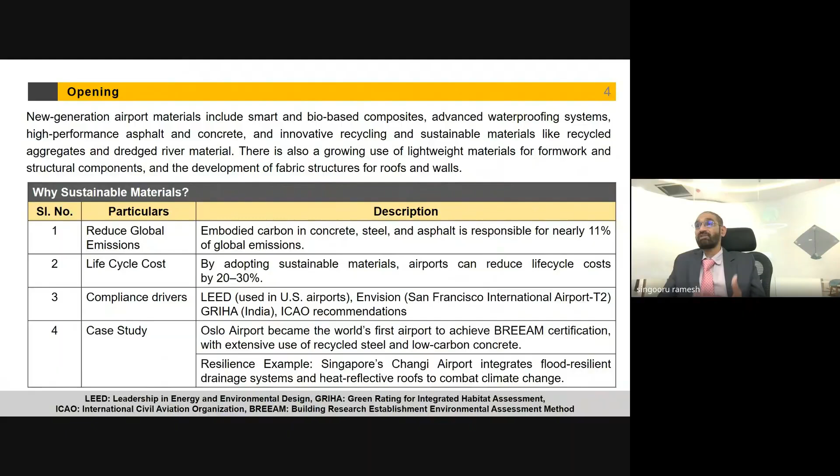Case study: Oslo Airport became the world's first airport to achieve BREEAM certification with extensive use of recycled steel and low carbon concrete. BREEAM is Building Research Establishment Environmental Assessment Method, so that is the first airport in the world. The resilience example is Singapore's Changi Airport, which integrates flood resilient drainage systems and heat reflective roofs to combat climate change. So these are the innovative methods being used in various airports.

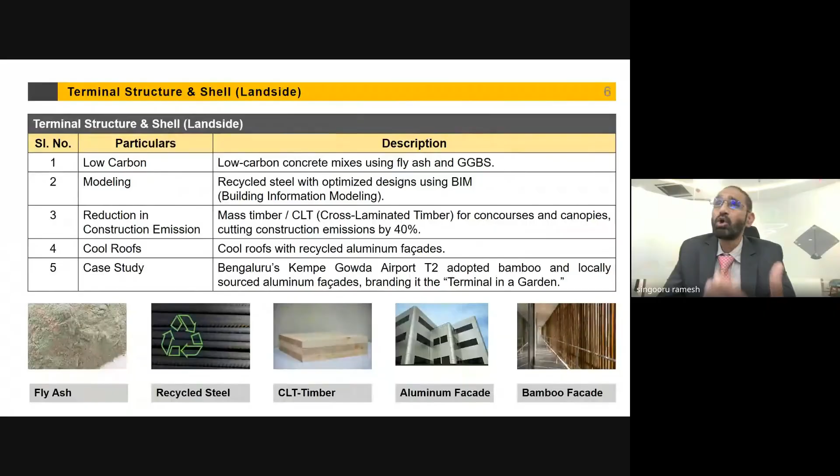I do not know how many of you have traveled to Terminal 2 in Bangalore. I'm sure many of you have. It's very, very elegant, and you can see all this innovative, low carbon sustainable materials have been used over there.

So again, coming to low carbon concrete, it utilizes supplementary cementitious materials, SCMs, like fly ash, slag, silica fume, to replace a significant portion of traditional Portland cement, thereby reducing carbon footprint. SCMs lower the amount of energy-intensive clinker required, which is the primary source of CO2 emissions in concrete. This not only decreases environmental impact but also enhances concrete durability.

It reduces CO2 emissions and also enhances concrete durability; that is the beauty here. Then rice husk ash, RHA, is another SCM that can be used. RHA is a byproduct of rice production that adds cementitious compounds to the mix. Then recycled aggregates: incorporating recycled aggregate materials from construction and demolition waste into the aggregate component of the concrete mix reduces the need for virgin materials.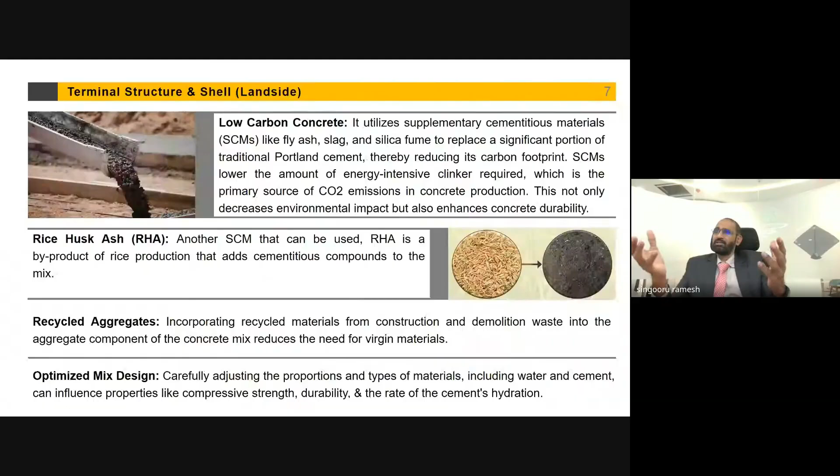For example, if you are demolishing a big concrete structure, you can extract all the waste steel and remove all the set concrete; all those things can be separated. You can take out and make recycled aggregates from that, and use it again for a new mix design, carefully adjusting the mix proportions including water cement ratio. This will influence the compressive strength, durability, and the rate of cement hydration. So all these factors will get impacted.

Then we discussed cross-laminated timber. It is an engineered wood product. Wood is totally a green product, made by gluing multiple layers of solid sawn lumber at a 90-degree angle to create large, high-strength structural panels used for walls, floors, and roofs in buildings.

You can see the benefits here. It's totally a green product. What is timber? Timber is directly from the tree, and the tree is what is a green product.

Bamboo facades: bamboo is durable, fire resistant, and has a natural look. It is stable and available as boards or beams and easy to maintain. It has been used in Kempegowda International Airport Terminal Building 2 in Bangalore.

Then recycled aluminum: recycled aluminum is aluminum that has been processed from scrap and end-of-life products to create new aluminum products, using significantly less energy than virgin aluminum production.

Then terminal interiors and fit out. In terminal interiors and fit out, also recycled material like tiles, terrazzo, and modular flooring systems are used.

Indoor pollution, low VOC. Low VOC means whatever paints we use in our houses and buildings contain volatile organic compounds. If you see when there's new painting, there's a lot of smell, sneezing, and eye burns. So you can use low VOC paints.

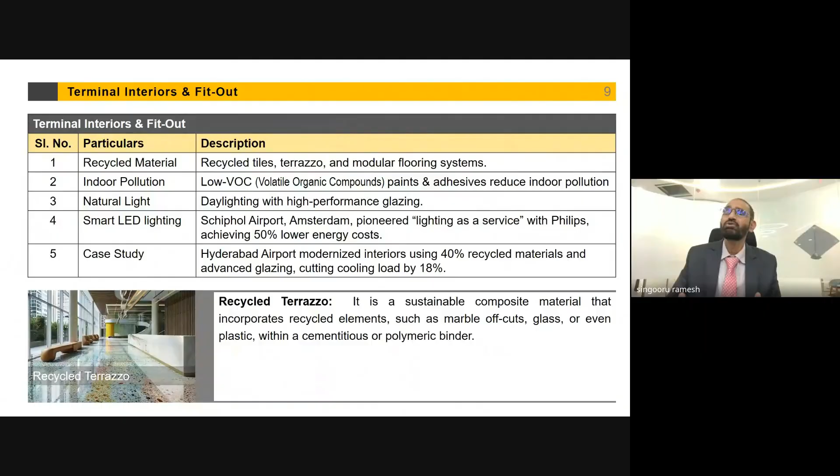Then LED lighting. It provides airports with significant energy and cost savings through high efficiency and long lifespan, enhances passenger and staff safety with better visibility and fewer maintenance risks, and improves passenger experience by creating welcoming, dynamic terminal environments that meet sustainability goals.

VOC paints, as I said, contain volatile organic compounds that evaporate and release fumes into the air as paint dries, causing the characteristic new paint smell and potential health issues like headaches, irritation, nausea. So use low VOC paints, which contain less volatile organic compounds than traditional paints, typically less than 50 grams per liter, and off-gas less. That is the advantage.

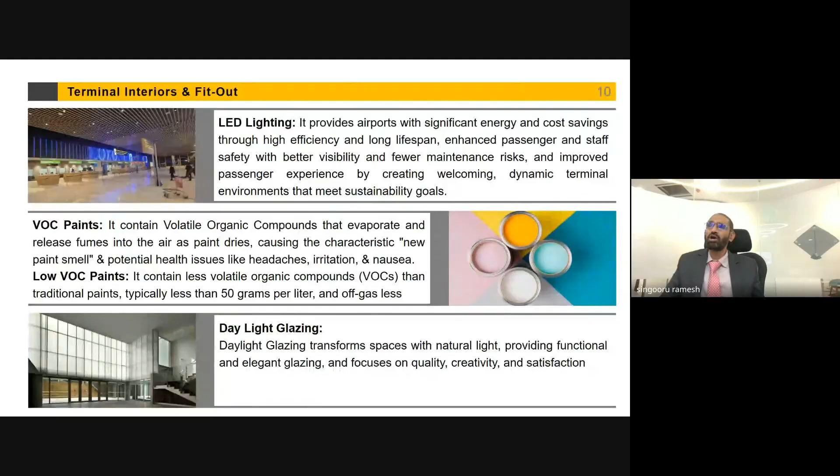Daylight glazing. You can see in the photograph how daylight glazing transforms spaces with natural light, a beautiful look, providing functional and elegant glazing with focus on quality, creativity, and satisfaction. These are all innovative thoughts and adoptions in the industry.

Now coming to the air side, the runway and taxiway asphalt options. The warm mix asphalt reduces energy by 20% and cuts emissions, and is widely deployed in US FAA approved projects.

Reclaimed asphalt, RAP, which we discussed in the earlier session, saves cost by 15 to 20%. Then modified binders, also discussed earlier, used in Indira Gandhi Airport in Delhi.

There is tested crumb rubbered asphalt, reusing thousands of waste tires, used here in Delhi.

Coming to warm mixed asphalt, this method involves using foaming techniques, chemical additives, organic additives to reduce the viscosity of the hot bitumen binder. This allows the asphalt mix to be produced and worked at lower temperatures compared to hot mix asphalt.

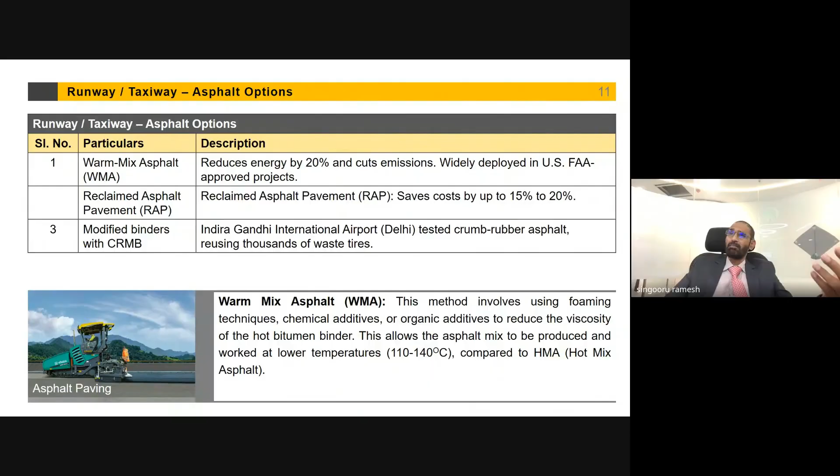Because tomorrow, during adverse weather conditions, or during war, or during some other catastrophe, or because of natural calamities or force majeure situations, these emergency landings will be required. So you need not have a separate airstrip for that - you can use the existing highway itself for the emergency landing.

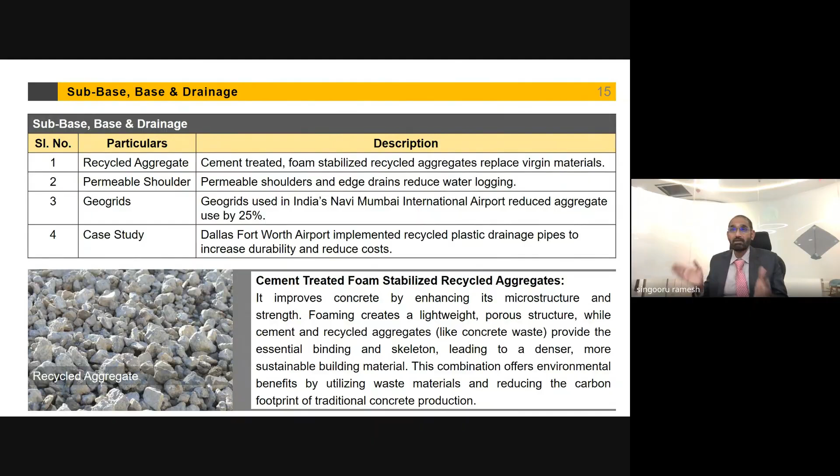So again, on the air side, the runway will have subbase, base and drainage. Drainage is very, very important. Like in Mumbai airport, when Mumbai is prone to heavy rains, sometimes the rainfall is even 50 centimeters, 60 centimeters, 80 centimeters - such dense rain occurs here and it floods the entire area. So proper drainage is important. Otherwise, if the aircrafts are suspended, there is a lot of loss to the traffic, to the aircraft operators.

The airport operators, everybody - and people who have planned their meetings or are traveling in an emergency - everybody will suffer.

So proper drainage is important. Here again, they have to be properly designed by using sustainable materials like recycled aggregate, cement treated foam stabilized recycled aggregate, and permeable shoulders. If you use permeable shoulders at the edge of the drains, water will automatically escape, pass through the drainage provided, and escape to the desired location, where you can also do water conservation. You can see in airports there will be some surface drains, and all those drains are for this purpose only.

So geogrids are also used. Earlier somebody asked whether we can use them in water retaining locations - these are all geogrids and all are used. It's used in Mumbai, in Navi Mumbai International Airport, where it reduced aggregate by 25%. And in Dallas in the US, Fort Worth Airport implemented recycled plastic drainage pipes to increase durability and reduce costs. So these are various practical applications.

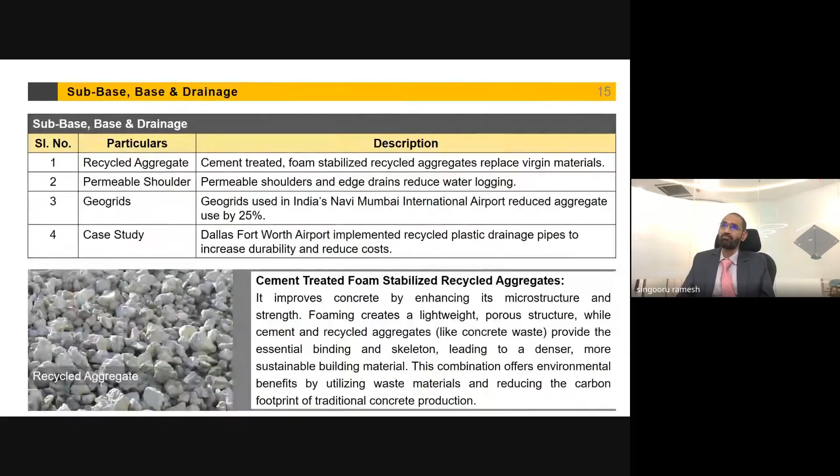Then there's cement treated foam stabilized recycling - this is another method. It improves concrete by enhancing its microstructure and strength. Foaming creates a lightweight porous structure, while cement and recycled aggregates, like concrete waste, provide the essential binding and skeleton, leading to a denser, more sustainable material. This combination offers environmental benefits by utilizing waste materials and reducing the carbon footprint of traditional concrete production.

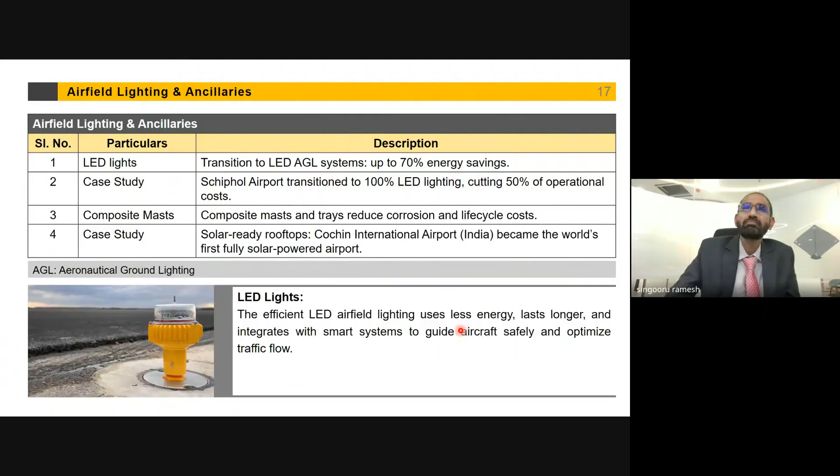These are the composite masts - made from materials like carbon fiber and fiberglass. Again, they are sustainable materials, offering a lightweight, strong, and durable alternative to traditional metal masts, making them ideal for tactical, airport, marine, and utility applications where performance and resilience are critical. Rooftop solar panels, what we discussed earlier - this is the typical one at Cochin International Airport.

This is one important aspect. Nowadays, all the airports are looking into these aspects. In India, the airports are broadly classified, from an administrative perspective, into two categories: government-run airports and private airports.

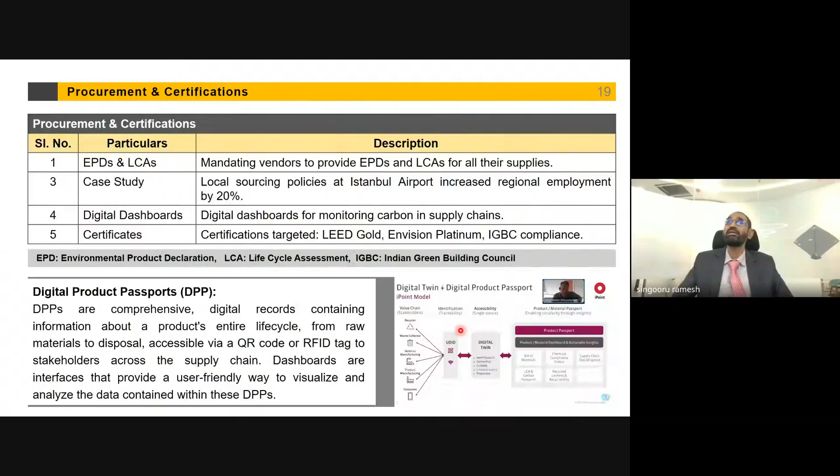Then LEED certifications. EPD is environmental product declaration, LCA is lifecycle assessment, IGBC is Indian Green Building Council. All these certifications are very crucial. Without these certifications, the lenders and bankers will not fund private airports, or even government airports. The government also takes a lot of loans for developing new airports or highways. So everywhere they are looking into ESG compliance - this is part of ESG compliance.

So there's also a LEED Gold certification - a certification level within Leadership in Energy and Environmental Design, a green building rating system awarded to projects that earn between 60 to 79 points, meeting rigorous standards for sustainable design, energy efficiency, and human health. Those getting 60 to 79 points will receive the LEED certification, and the bankers, lenders, ADB, World Bank try to encourage this, because it's a global concern.

The world's eco committees and such are very focused on this. So all money investments are also linked to this ESG compliance. Then there's the IGBC certification - a voluntary green building rating and certification system developed by the Indian Green Building Council to promote and verify the adoption of sustainable building practices in India, which we have been discussing for the last 2 hours.

Then the Envision rating - a sustainability assessment and recognition system for civil infrastructure projects developed by the Institute for Sustainable Infrastructure (ISI) and others, similar to LEED for buildings. These have become the need of the hour. Someone trying to avoid this can avoid it, but they will not get any funding, and there'll be a lot of restrictions in approvals too.

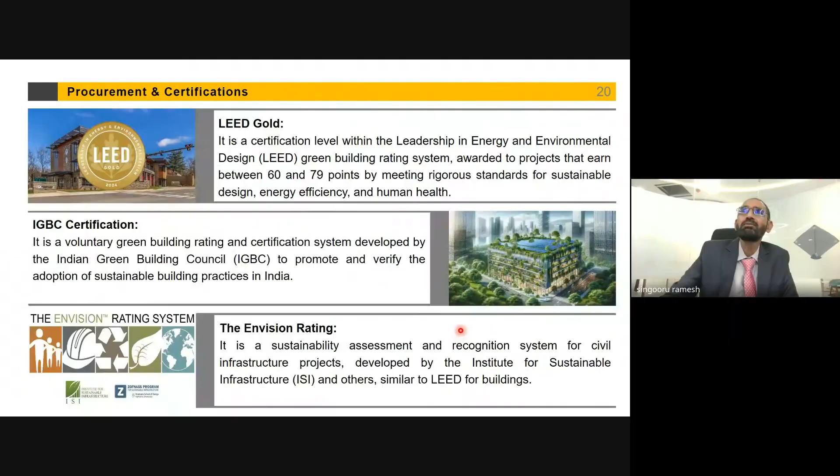So this is the roadmap and call to action. Baseline - the baseline of the topic is carbon modeling at the design stage. This is very important. You have to do the modeling at the design stage itself. If you want to implement something at a later date, so many issues will crop up - cost, approvals, technicalities, contractual issues, so many things come into picture. So do the modeling at the design stage itself.

Then the second thing is mandating low carbon concrete mix and QA/QC. It is specified - someone earlier, Dr. Gopinath, asked me if it's specified, and I said yes, it is being specified by the state governments, specified in the contract itself. So mandating low carbon concrete mixes is very important, and it has to be done at the inception stage itself.

Then, procure from an approved vendor list with EPD, Environmental Product Declaration compliance. For example, Dubai Airport has done this. An approved vendor list means only products from these vendors should be procured - automatically, you will get the green products.

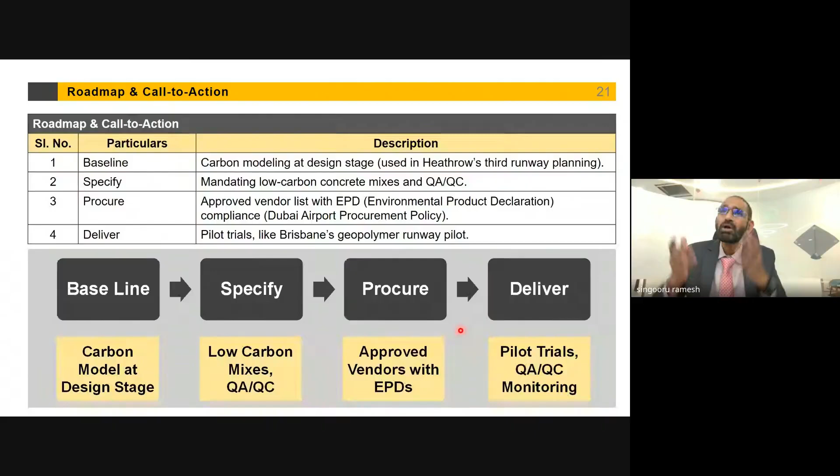So this has to be mandated at the very inception stage. Then I'll give an example: the pilot trials like Brisbane Geopolymer runway pilot. Pilot here doesn't mean aircraft pilot, it is a pilot project. In Brisbane, Australia, geopolymer was used in the runway. They did a trial and it was successful. So all these things have to be done at the inception, the very inception, so that issues at a later date can be mitigated.